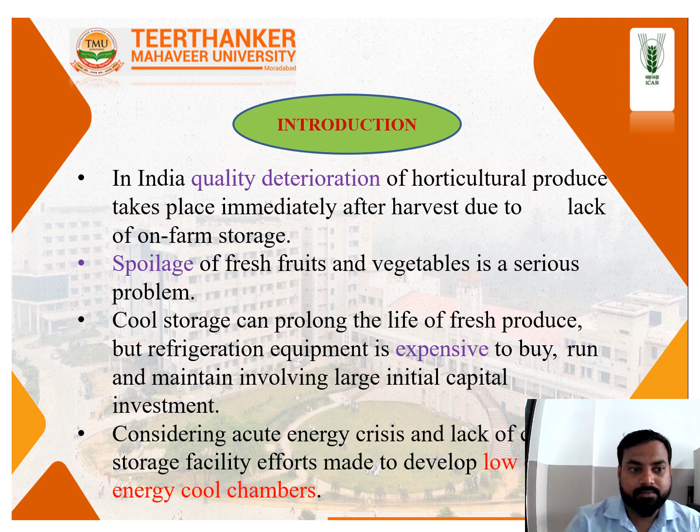Next, considering the acute energy crisis and lack of cool storage facility, efforts were made to develop low-cost zero energy cool chambers, a low cost alternative for on-farm storage of fruits and vegetables. ZECC stays 10 to 15 degrees Celsius cooler than outside temperature and maintains relative humidity of 90%. This is the zero energy cool chamber.

Principle. It is based on the principle of direct evaporative cooling. The cooling effect is obtained by evaporation of water, and the faster the evaporation, the greater the cooling. Cool temperatures slow the respiration process, keeping fresh produce for a longer time and avoiding spoilage.

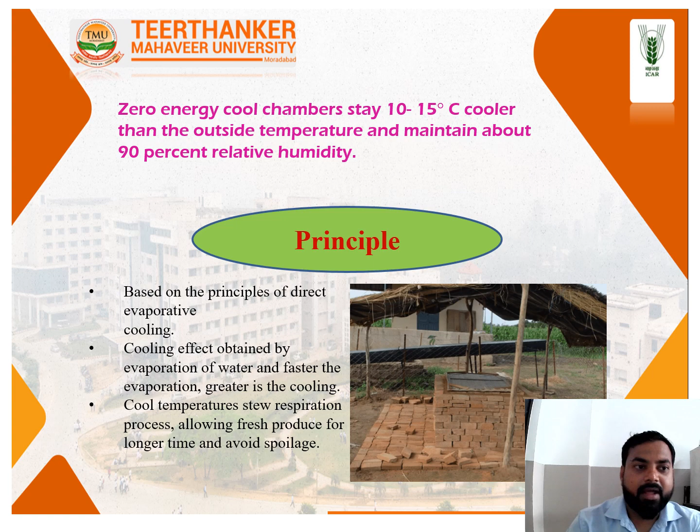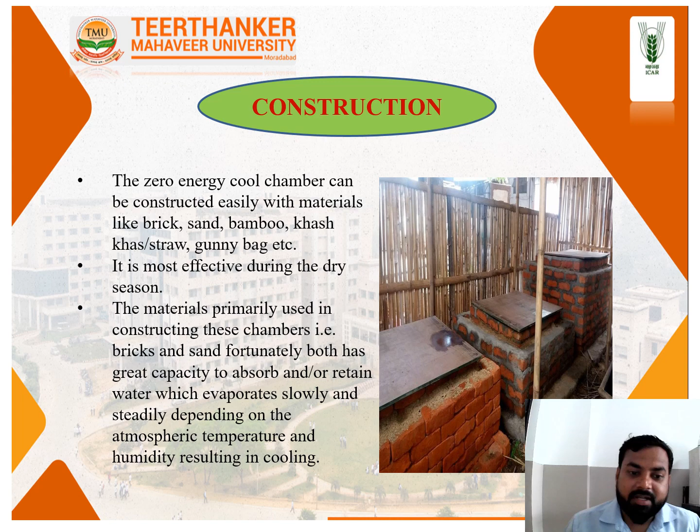Construction. The zero energy cool chamber can be constructed easily with materials like bricks, sand, bamboo, khas khas or straw, gunny bags, etc. It is most effective during the dry season. The materials primarily used are bricks and sand. Fortunately, both have great capacity to absorb and retain water, which evaporates slowly and steadily depending on the atmospheric temperature and humidity, resulting in cooling.

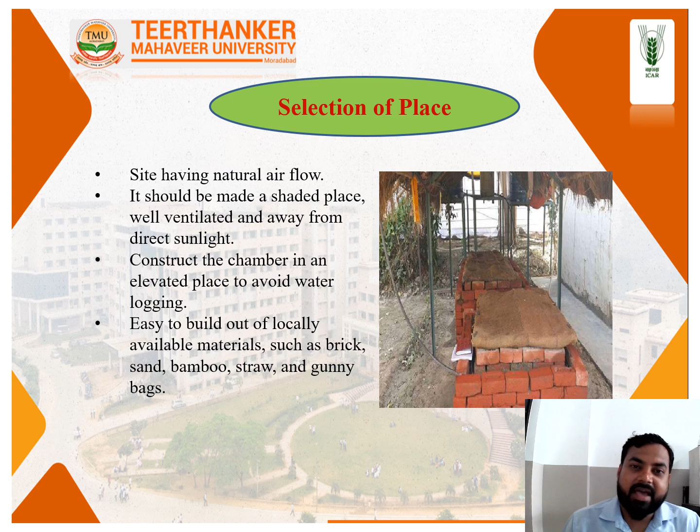Selection of place. The site should have natural air flow, be a shaded place, well ventilated and away from direct sunlight. Construct the chamber in an elevated place to avoid water logging. It is easy to build out of locally available materials such as bricks, sand, bamboo, straw, and gunny bags.

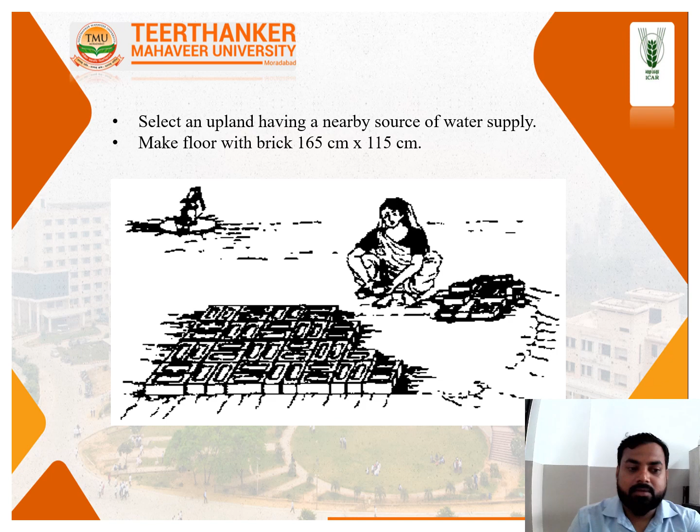Next topic is steps for construction of ZECC. First, select an upland having a nearby source of water supply. Make a brick floor of 165 centimeters by 115 centimeters, close to the water source. Erect a double wall 70 centimeters high, leaving a cavity 7.5 centimeters wide between the two walls.

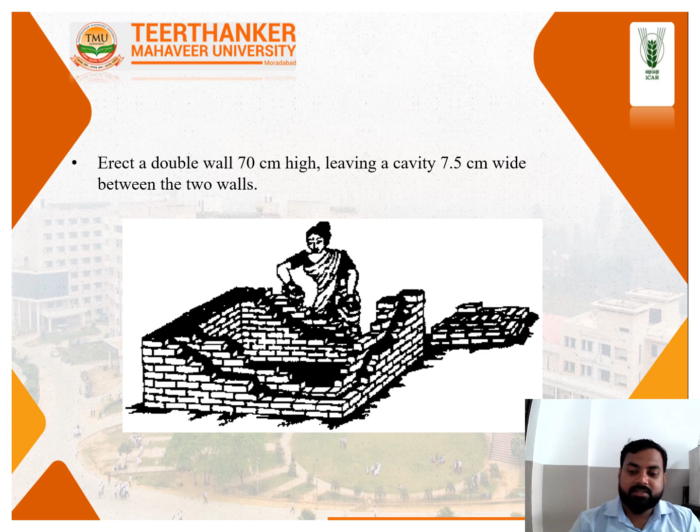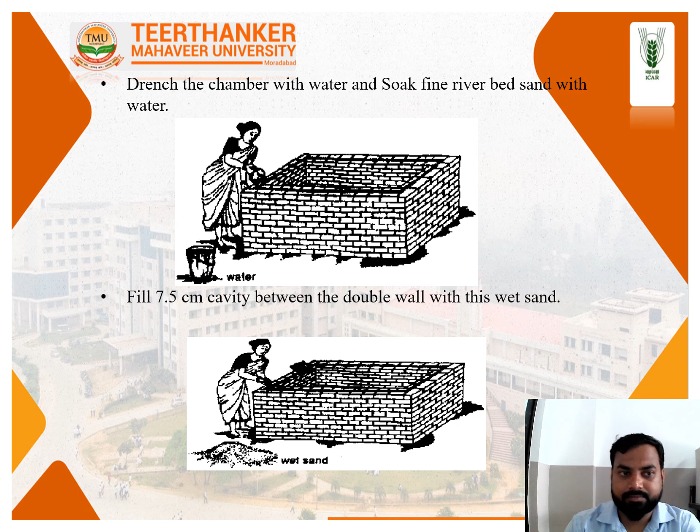Drench the chamber with water and soak fine river bed sand with water. Fill the 7.5 centimeter cavity between the double wall with this wet sand. Make a frame of the top cover with bamboo, sirki, straw or dry grass. The cavity between the walls is filled with sand and the bricks and sand are kept saturated with water.

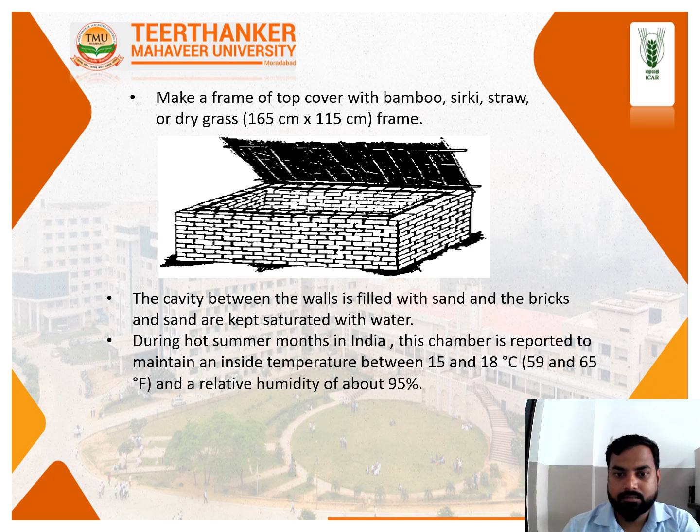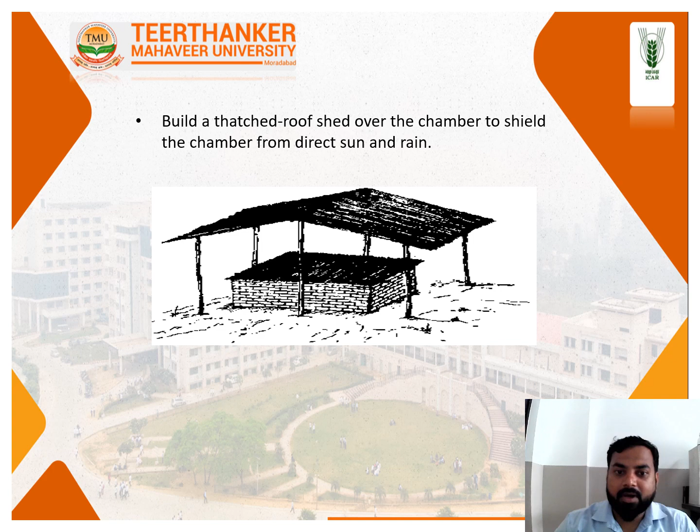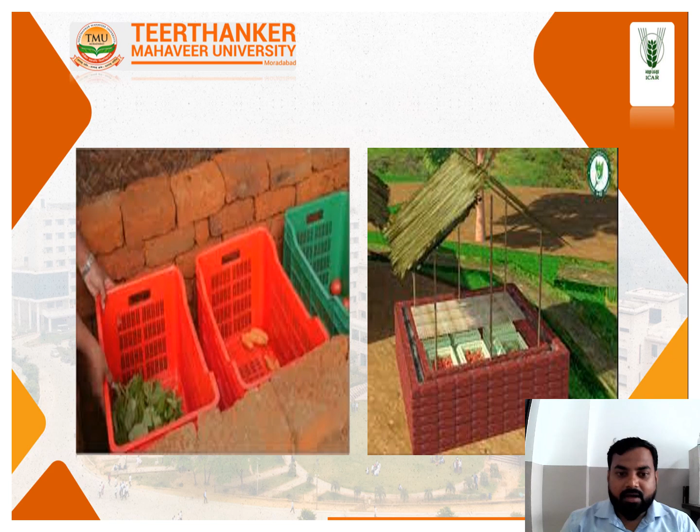During hot summer months in India, this chamber is reported to maintain an inside temperature between 15 and 18 degrees Celsius and a relative humidity of 95%. Next step is to build a thatched roof shed over the chamber to shield it from direct sun and rain. And this picture is storage of fruits and vegetables.

Requirements. What are the requirements of ZECC? First, make shed over the chamber to protect it from direct sun or rain. Keep the sand, bricks and top cover of the chamber wet with water. Water twice daily to achieve the desired temperature and relative humidity, or fix a drip system with plastic pipes and micro tubes connected to an overhead water source.

Store the fruits and vegetables in this chamber by keeping them in perforated plastic crates. Cover these crates with a thin polythene sheet. The cool chamber should be reinstalled once in 3 years with new bricks, utilizing the old bricks for other purposes. Do not use bamboo, wood or fiberboard boxes because these will be damaged by moisture.

Keep the sand, bricks and top cover of the chamber wet. Water twice daily, in morning and evening. Water supply can be done from a drip system.

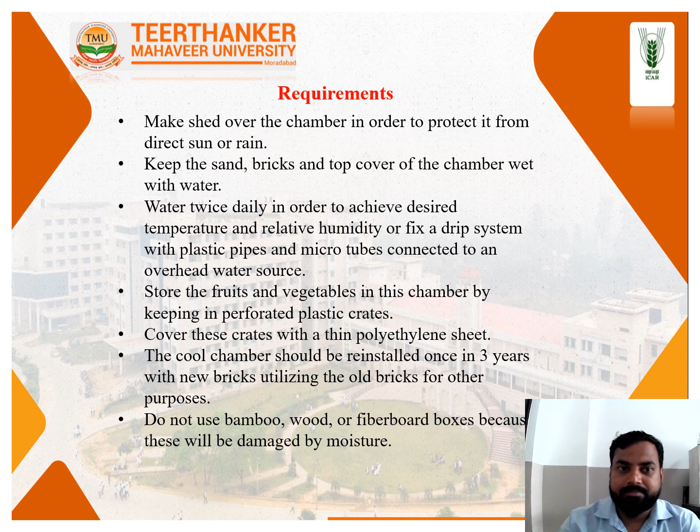Advantages. What are the advantages of ZECC? It can be constructed by unskilled labor and no mechanical or electrical energy is needed. Farmers can store produce for a few days, so avoiding costly rush selling, and it is ideal for household storage. It reduces losses and is useful for temporary storage of milk, curd and cooked food. It can be used for mushroom cultivation, raising silkworms and storage of biofertilizers.

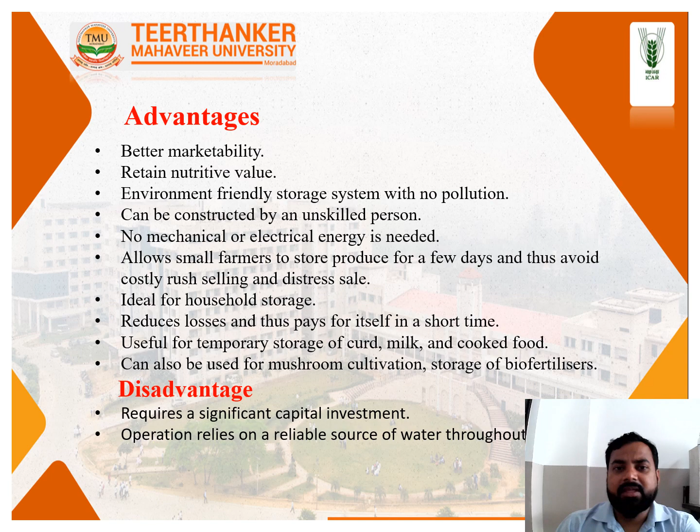Next point is disadvantages. What are the disadvantages of ZECC? It requires significant capital and a reliable source of water supply throughout the year.

Precautions. What are the precautions for ZECC? Site it in a place where breezes blow. Build on an elevated site to avoid waterlogging. Use clean, unbroken bricks with good porosity, and always keep the bricks, top cover and sand saturated with water. Prevent water drops coming in contact with stored material.

Keep the chamber clean and disinfect it periodically with permitted insecticide, fungicide or chemicals to protect from fungus, insects, pests, reptiles, etc. Construct it under a thatch to avoid direct exposure to sunlight.

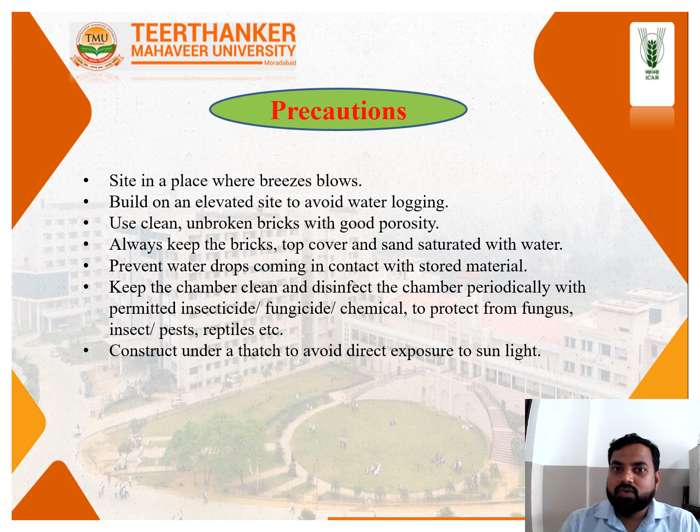Cost of cool chamber. The total cost for 1020 structures at Rs 4000 each comes to 40 lakh 80,000, which will be given as 50% subsidy to farmers. It comes to 20 lakh 40,000 for 100 kg capacity chambers.

Next point is areas of application. First is short term storage of fresh vegetables, fruits and flowers, growing of white button mushroom, ripening of tomato and banana, plant propagation and storage of processed fruit products.

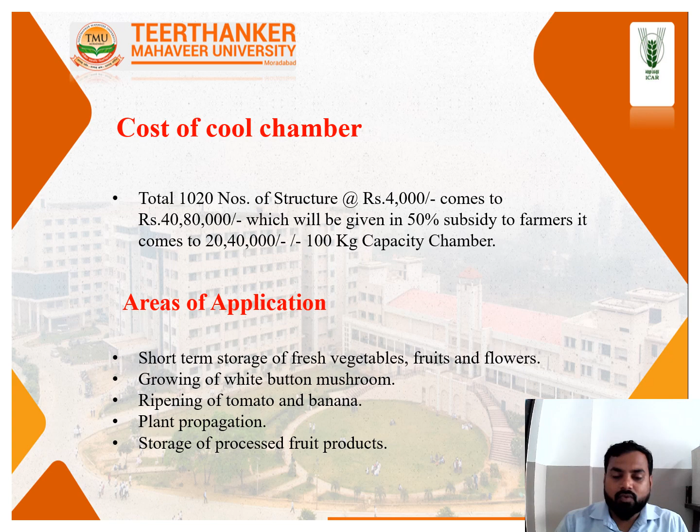This topic is the scope of cool chambers. What is the scope of ZECC? The proposed cool chamber can be installed in different places of handling. At present fruits and vegetables are handled in open sheds, and their freshness is prone to considerable deterioration. It is suggested that a battery of commercial size cool chambers can be installed in wholesale markets.

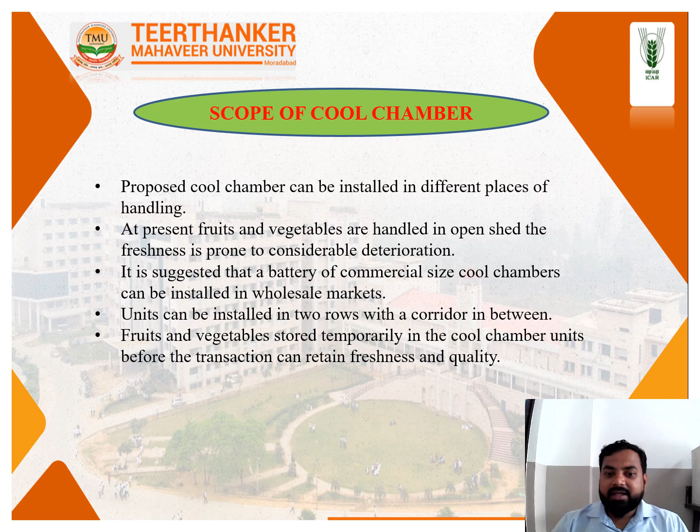Units can be installed in two rows with a corridor in between. Fruits and vegetables are stored temporarily in the cool chamber units before the transaction and retain freshness and quality.